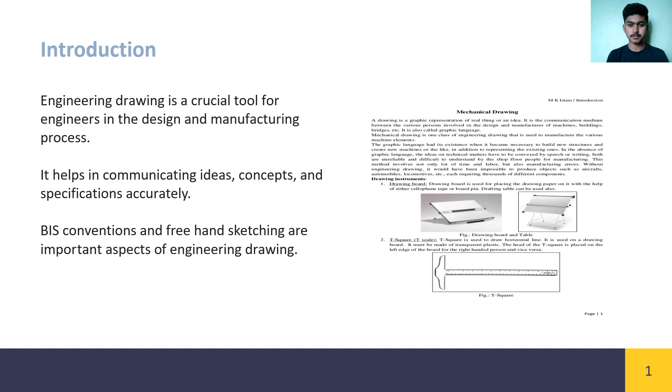Significance of engineering drawing. Engineering drawing serves as a universal language for engineers, enabling effective communication. It ensures accuracy and precision in the design and manufacturing process. It aids in visualizing and understanding complex engineering concepts.

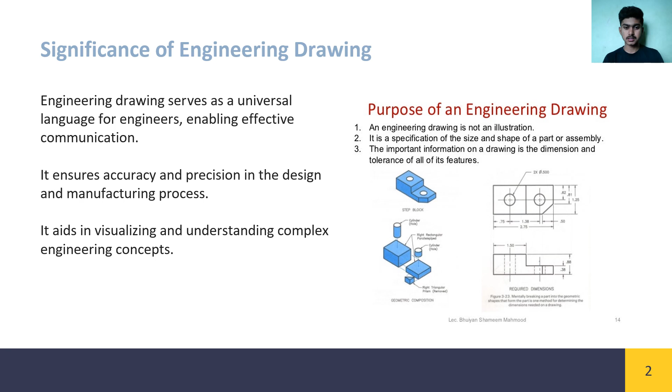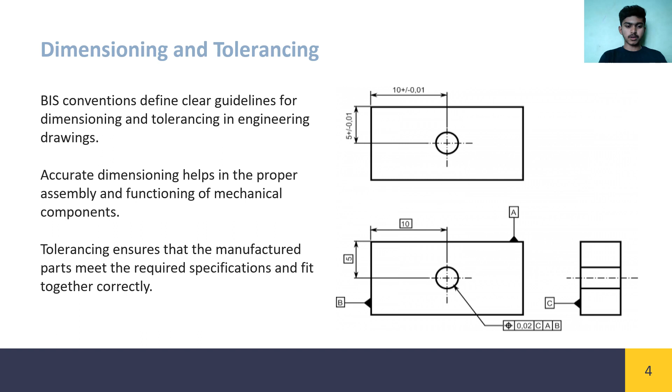Dimensioning and tolerancing. BIS conventions define clear guidelines for dimensioning and tolerancing in engineering drawings. Accurate dimensioning helps in proper assembly and functioning of mechanical components. Tolerancing ensures that the manufactured parts meet the required specification and fit together correctly.

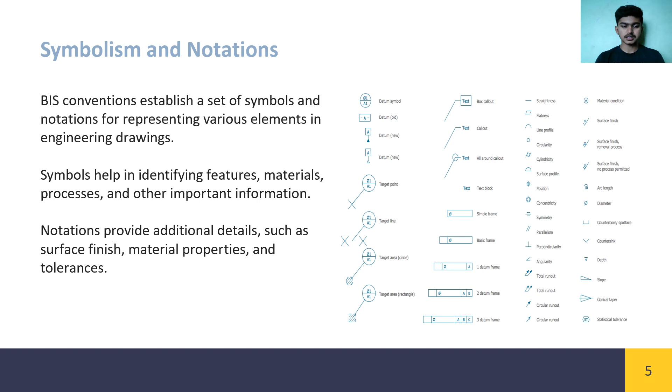Symbolism and notations. BIS conventions establish a set of symbols and notations for representing various elements in engineering drawings. Symbols help in identifying features, materials, processes, and other important information. Notations provide additional details such as surface finish, material properties, and tolerance.

Sectional views. BIS conventions specify the use of sectional views to represent internal details of complex components. Sectional views aid in understanding the internal structure, dimensions, and relationships of parts. They enable designers to communicate design intent and facilitate the manufacturing process effectively.

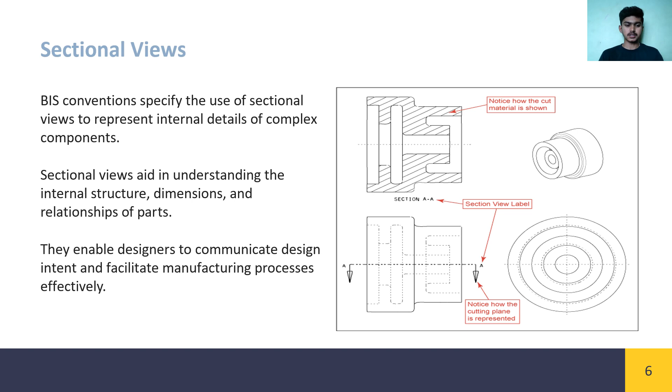Isometric projection. Isometric projection is a widely used technique for representing three-dimensional objects on a two-dimensional plane. BIS conventions provide guidelines for creating isometric drawings, which offer a realistic view of an object. Isometric drawings aid in visualization, spatial understanding and effective communication of design ideas.

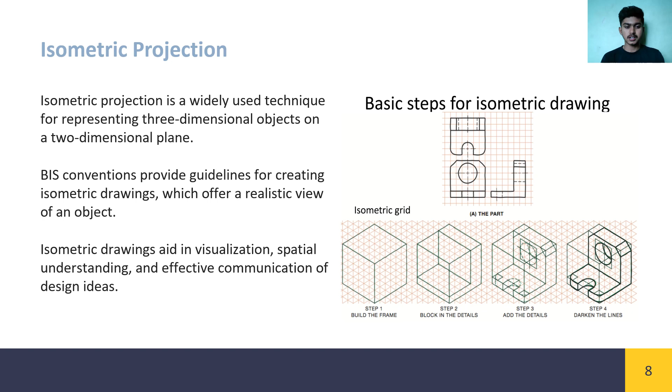Freehand sketching. Freehand sketching is a valuable skill for engineers to quickly convey ideas during the initial design phase. It allows for the exploration of multiple design options and promotes creativity. Freehand sketches are an effective means of communication between engineers and clients, facilitating better understanding.

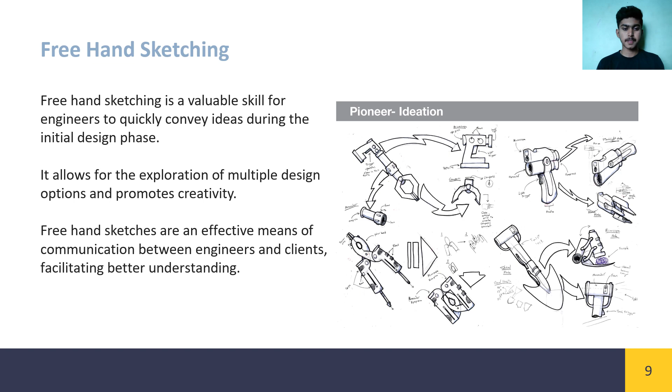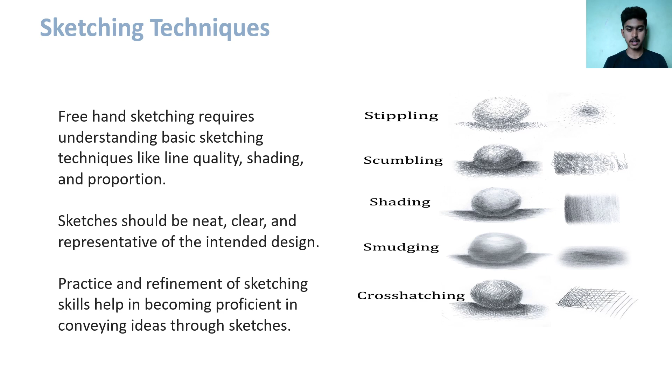Benefits of freehand sketching. Freehand sketching enables rapid visualization and iteration of concepts. It helps in problem solving, as engineers can quickly sketch and explore different solutions. Freehand sketches are a cost-effective and efficient means of communication during the collaborative design process.

Integration of freehand sketches. Freehand sketches can be integrated into formal engineering drawings to enhance clarity and understanding. They can be used to annotate or highlight specific design details. Integration of freehand sketches with engineering drawings adds a personal touch and aids in effective communication.

Digital sketching tools. With technological advancements, digital sketching tools have gained popularity in engineering design. Digital sketching tools offer advantages like flexibility, easier editing, and enhanced visualization. They allow for the integration of sketches into CAD models, streamlining the design processes.

Introduction to scales in engineering drawing. Scales in engineering drawing are used to represent real-life objects and structures accurately on paper. They help in determining the size, dimensions, and proportions of various elements in a drawing. Scales are essential for precise communication and understanding among engineers, architects, and other professionals.

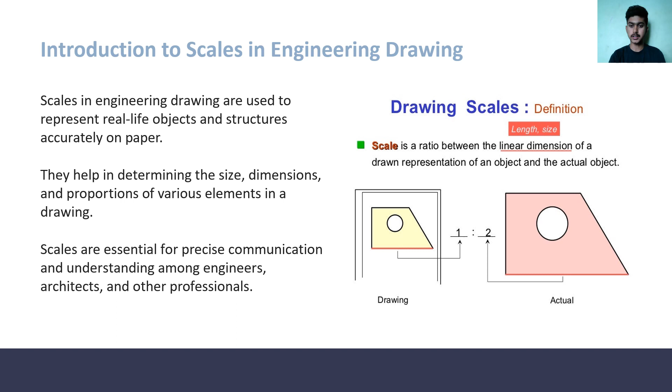The definition of a scale is a ratio between the linear dimension of a drawn representation of an object and the actual object. Types of scales. Architectural scale. Used in architecture and construction drawings. It typically represents measurements in inches or feet.

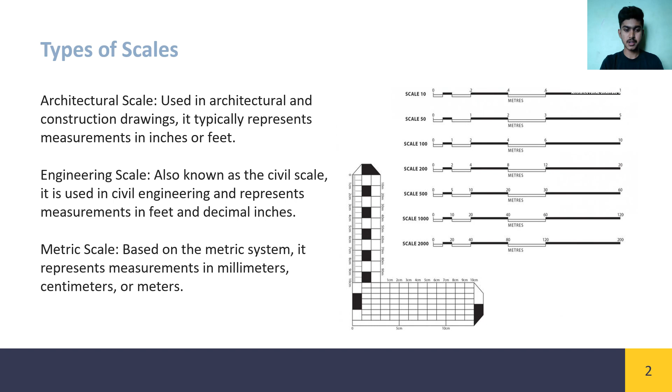Engineering scale, also known as a civil scale. It is used in civil engineering and represents measurements in feet and decimal inches. Metric scale. Based on the metric system, it represents measurements in millimeters, centimeters, or meters.

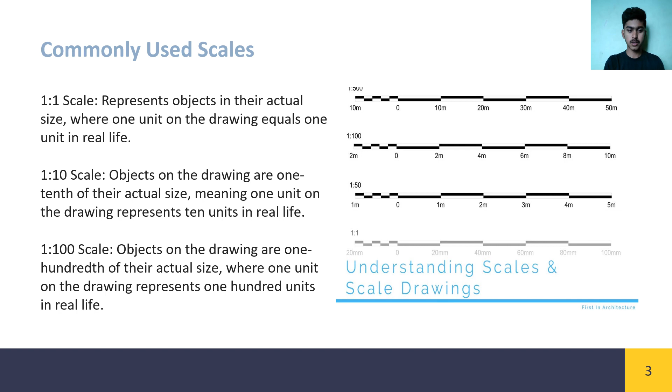Commonly used scales. 1:1 scale represents objects in their actual size, where 1 unit on the drawing equals 1 unit in real life. 1:10 scale: objects on the drawing are 1/10 of their actual size, meaning 1 unit on the drawing represents 10 units in real life. 1:100 scale: objects on the drawing are 1/100 of the actual size, where 1 unit on the drawing represents 100 units in real life.

Choosing the right scale. Consider the size of the drawing sheet and the level of detail required. Determine the largest and smallest dimensions of the object being drawn to select an appropriate scale. Consult industry standards or guidelines for the specific applications and projects.